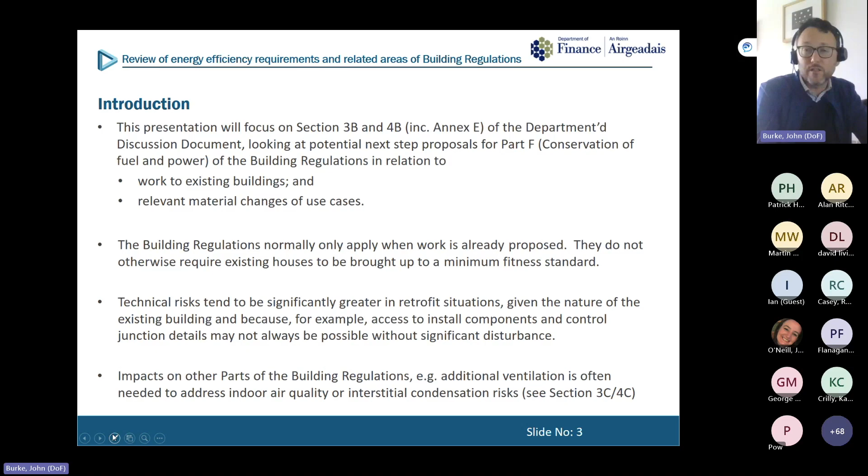It's also important to consider that there are always impacts on other parts of the building regulations—perhaps ventilation is required as you insulate, to address indoor air quality or interstitial condensation risks, but other parts like fire and structure are also obviously impacted by what you're looking at. So that always needs to be considered and maintained throughout, and we're taking that as a given in the rest of the presentation.

So we've got it in two parts: existing dwellings and then existing buildings other than dwellings. Many of the themes in the existing dwelling section are very similar to the proposals or measures for buildings other than dwellings.

I should say these sections are really focusing on next steps in this area. This is the phase 3 proposal. We have a 5-phase program. Our discussion document that we're talking about here is phase 2. The next uplift will be what we call phase 3.

So section 3B and section 4B are our next steps proposals for the standards for works to existing buildings, and they follow very much in line from developments in England and the other administrations, in a similar way to some of the previous sessions we've talked about. So section 3B relates to standards for a variety of situations.

There'll be standards for extensions, for new and replacement elements and services, for renovation of an existing element, or if you were to bring that element into the building - if you were roofing over a rear yard and the wall around that yard would now become part of the building, that would be a situation like that, perhaps. There'll be a retained element. And where a greater or lesser number of dwellings is created by a change of use in an existing building.

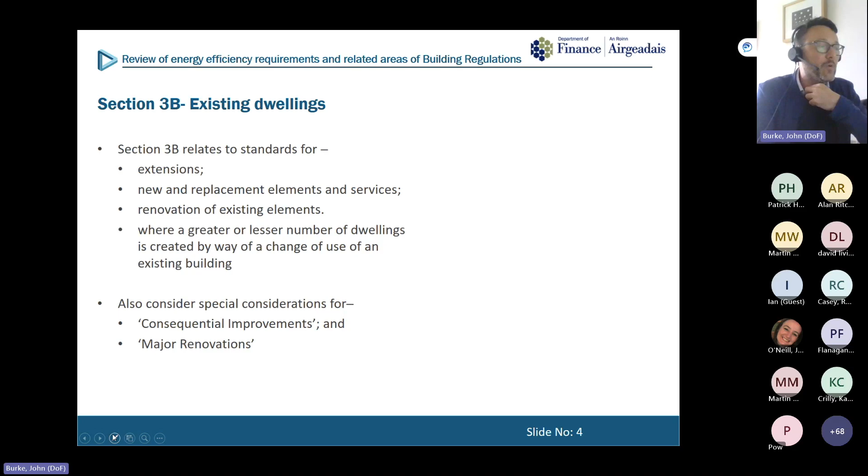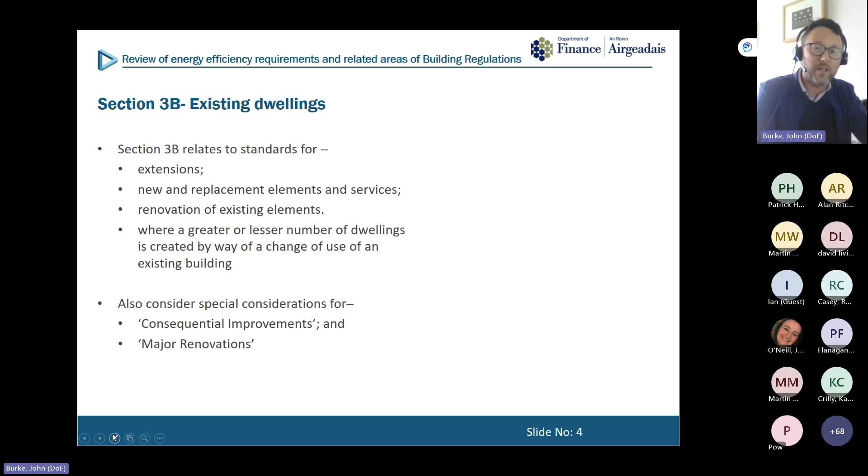There are also two important terms that those of you who've worked with the building regulations should probably be familiar with - that's consequential improvements and major renovations. So the documents give a bit of extra consideration around those, because they're specific things we'll talk about. We talk about these standards in general, and then we move to those specific scenarios, those specific situations.

In terms of the regulations, the general requirements tend to stem from regulations that sit within Part A. That's Regulation 6 and Regulation 7. Regulation 7 applies to the structure and the envelope. Regulation 6 is the application to services and fittings.

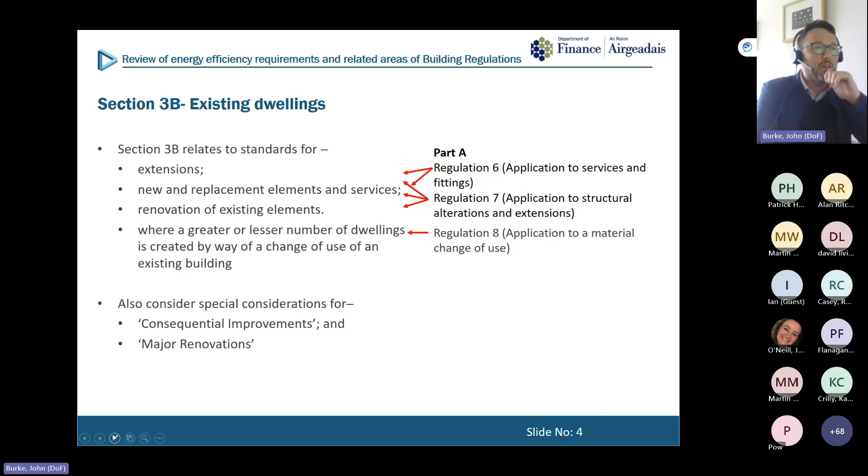Regulation 8 is a bespoke table of what bits apply where whenever you have a material change of use, and has other considerations in it beyond that, of course, but Regulation 8 is what's governing that.

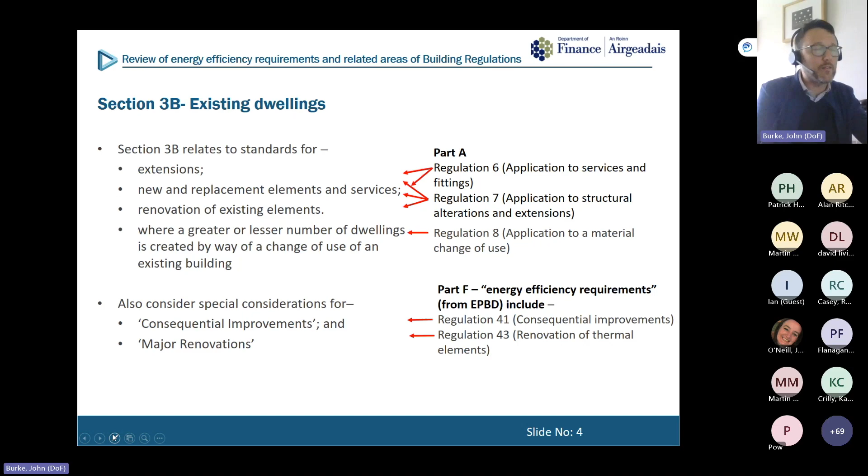Whereas these other issues like consequential improvements and major renovations really stem from some requirements which flow from the Energy Performance of Buildings Directive, the energy efficiency requirements, some of them are known as. So there's Regulation 41 and Regulation 43, and they're quite particular and come from that history and through that route.

So we've mentioned in an earlier session about a legislative refresh. What we have here - obviously you can't read it all - is the extract on the current legislation for Part F. There's a lot of it, and a lot of it has flowed from the Energy Performance of Buildings Directive.

Some of the wording in it, we think there ought to be some scope for improvements or simplification there. So we have a general question in section 2 of the document, but I think it's worth highlighting here, where we ask about a legislative refresh around that.

It's just worth comparing it to Part D. There's Part D by comparison for structure. So there's quite a difference there, and the general intent of the building regulations would have been that regulations should perhaps be more akin to the likes of Part D, with a general overall reasonableness or adequate level of performance or requirement, and then the details really provided in the technical guidance.

So if we can have a legislative refresh and try to simplify - I don't think we'll get back to the simplicity of Part D, but if we can maneuver back toward that approach, that's something that is a bit of an aspiration for us, if it's possible. So question 2A.4 asks about that and asks about your ideas around that. It's worth bearing that in mind, particularly as we come to look at aspects of consequential improvements and major renovations and things - that'll come up a bit later.

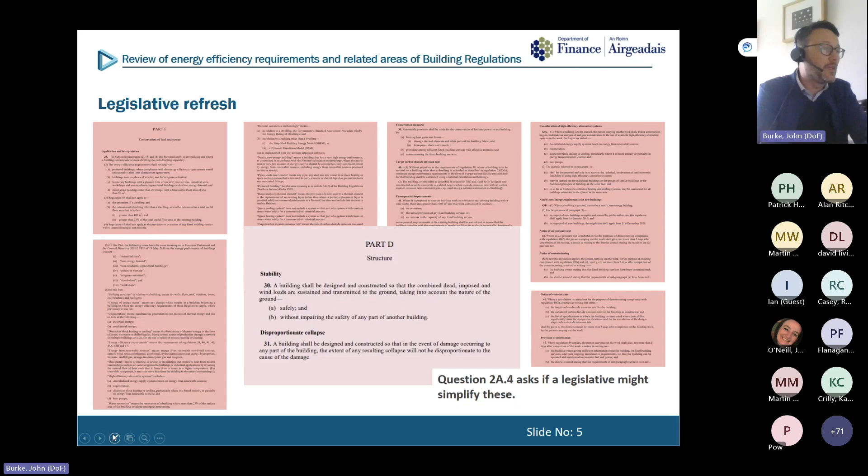We also have a general theme around traditional construction. There are aspects of Part F and things that don't necessarily need to be applied—and I must correct that slide, because it's not quite right, it should really be referring to Article 3A—but that the enforcement can be applied taking into account the character and appearance of the building. Some aspects of Part F are also explicitly excluded, and that's catered for in Regulation 38.

So when it comes to traditional construction or protected buildings, they're really looking for the character and appearance. We're interested in whether that might be extended, because vapor permeable and traditional construction is an area where careful judgment is really needed. We're looking to see what might be done around that as a general theme throughout the document. So if we're setting standards, do we have different standards for traditional construction, or do we refer out from that?

Clearly the assessment of traditional construction and its ability to support renovation measures is a developing area. There's lots of new things coming through with multiple interacting issues, and it requires balancing and considerations in each case. So we're alert to that, and it's a bit of a theme that flows through the consultation.

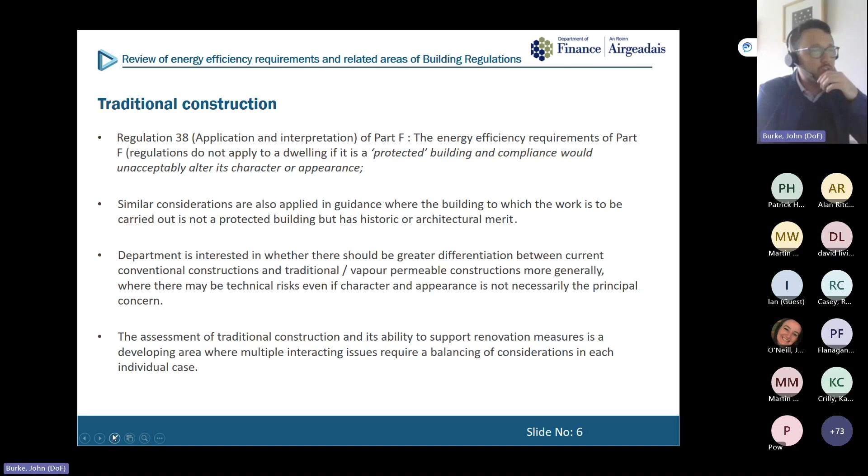In general, I'm sure most of you are aware, but it's worth reviewing—there are generally three approaches, particularly when looking at extensions: a standards-based approach, a calculated trade-off approach, and an equivalent carbon target approach. We'll discuss those now, but it's important to realise that not all of those approaches are available in all situations.

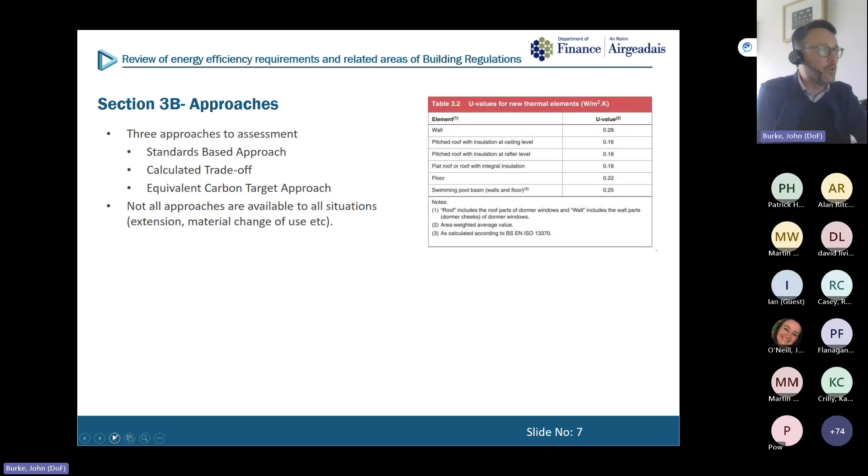For example, a calculated trade-off approach mightn't necessarily apply when the majority of the measures you've got are existing or renovated elements. There's a cost-effective thing you should do to a renovated element, and that kind of applies throughout the process. We'll come to this as we go through it. But the standards-based approach is obviously the most straightforward.

It takes each item, whether it's a wall, a window, a boiler, a radiator, whatever it is, and it sets a requirement for what the standard ought to be for that new element or that retained element, if you're doing work to it—so if you're building that, or if you're renovating it.

So we've got there the current table for the minimum U values for new thermal elements, which appears in the current guidance. And if you follow each of those, and each step and each part of your building meets that requirement, then that's fine.

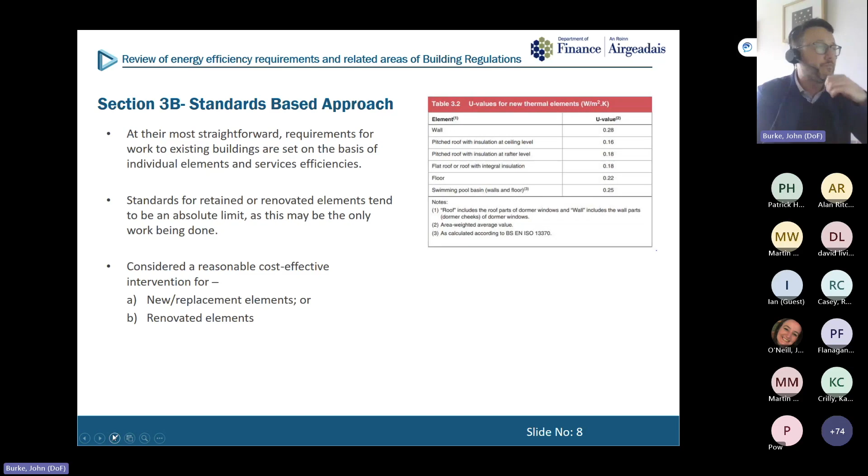The calculated trade-off approach is an alternative approach where you can have a lower standard in one area, provided you improve the standard in another, and it generally relates to the U values of elements only—so it's not looking at services. It assumes you're meeting all the minimum services requirements and allows you to calculate, and as long as your average U value performs the same as the U values for each of the thermal elements, then that's acceptable.

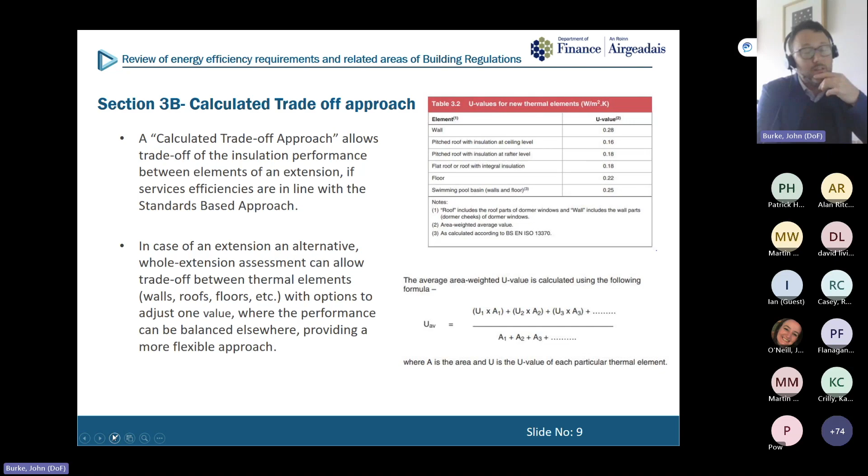And that would be used a fair bit in extensions, particularly where a more glazed extension than the limit assumed under the standards-based approach is needed. I'll just go back a slide—have we got that in the standard slide? No, it should have included a note that glazing limits would apply, and so this would be one way to have additional glazing if that were something you wished or wanted.

Then the third approach is an equivalent target approach. You can take a more holistic model, so you could balance some services, some renewables, some U values, and again model that against the standards-based approach. You design your building as per the standards-based approach, model that, then design the building the way you want it and model that. If the emissions under the second are no worse than the emissions under the first, that can allow you to construct to that level.

So that provides really quite a lot of flexibility, particularly because you could then incorporate measures in the existing building to compensate for maybe a slightly poorer standard in an extension, or by adding renewables you can offset.

There's quite a lot of flexibility in where this is permitted. The important thing to note, as people from the last session will know, is that there were two new metrics to be brought on board: one is primary energy, and the other, in England only, which we're thinking of following, is the fabric energy efficiency standard requirement. So as well as the current emissions requirement, under this equivalent target approach, the proposal might be that you also have to meet the primary energy performance and the fabric energy efficiency performance, in the same way you do for emissions requirements.

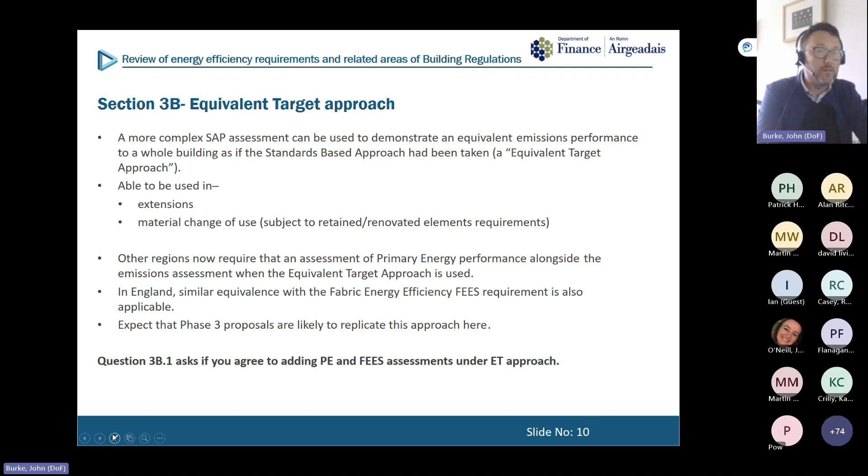In terms of elemental standards, the guidance across all the regions provides for a variety of situations with different terminology, different solutions, and different outcomes depending on the extent of work you're doing. In the document I've tried to rank them from extensions down to retained elements. Extensions and new elements tend to have a 'situation A' level of standards, broadly similar to new build situations, whereas 'situation B' is where you're retaining elements and structures, and perhaps renovating them, which usually has a different, often lower, standard of performance expectations.

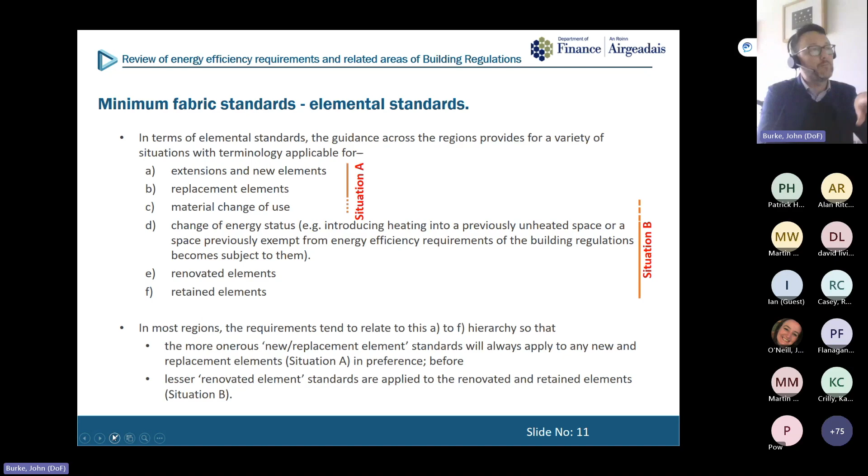You'll notice that material change of use is dotted in one and dashed in the other, because that's the crossover point about what standards or expectations you should expect to see. But as I've noted in the bullet points, the more onerous new replacement standards will always apply to any new replacement elements in preference. So broadly, with this ranking or hierarchy, you have to ask: have I got an extension, or am I building new elements? Those are the standards that apply, and then you work your way down the list as to which situation is expected to apply.

When we look at the building fabric, which is probably of the most concern to architects, the standards adopted in the other regions have been uplifted to come more broadly into line with new build expectations, and I think that's quite a significant uplift. There's a very big improvement in the standard expected compared to the current position. Our new build requirements were uplifted recently, in June 2022, and came into effect, but nothing was done to uplift the standard for new elements and extensions alongside that. So this will catch that up and bring it into line with the expectations for new builds after the next uplift.

These give you a flavour of the kind of U-values proposed. There isn't a huge amount of difference between the different regions. There's a whole building approach that sometimes applies, and whether you can offset and trade is relevant to some degree, because it impacts when you can do a calculated trade-off or not, and how that all works.

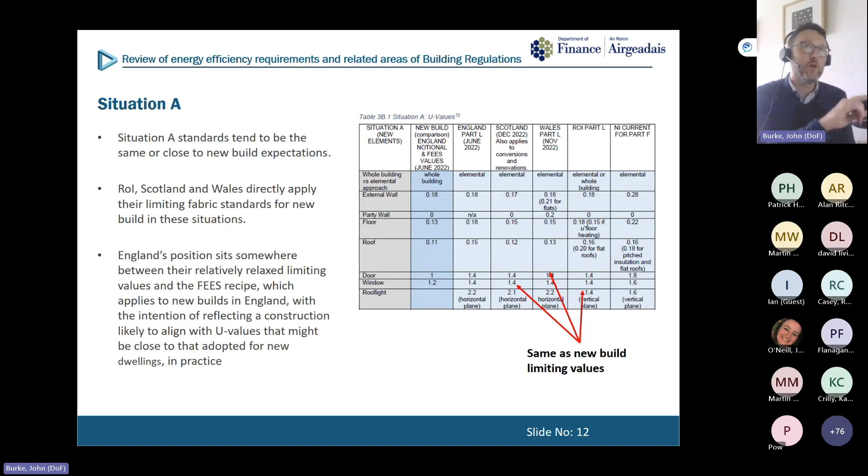Broadly speaking, the Republic of Ireland, Scotland and Wales are directly applying their limiting standards - the lowest standard acceptable for a new build is what they've put in. Whereas England has higher limiting standards, but also a fabric energy efficiency requirement for its new build, so it has split the difference more between its fabric values and new build requirements. The big one, and the interesting one, is for walls - it's expecting walls to achieve 0.18, which I think is quite significant. We believe that's halfway between the new build limiting values and the notional dwelling values, which is the model you have to broadly match in terms of emissions, primary energy, and fabric performance in England.

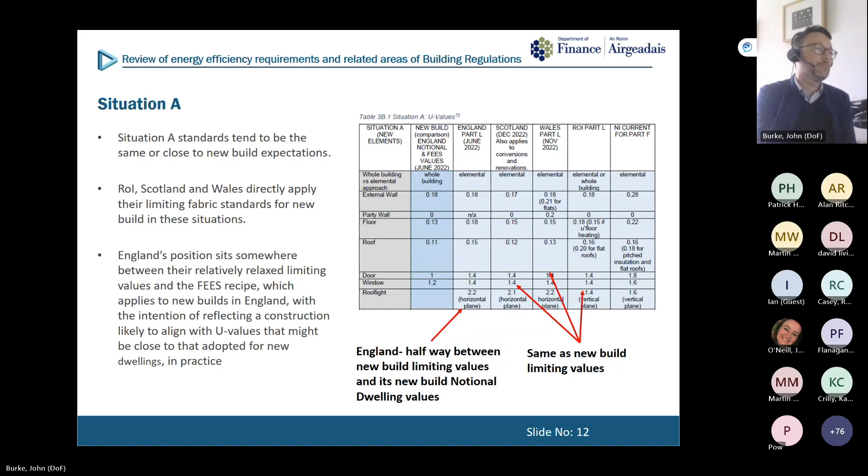England's consultation noted that its standards are intended to reflect the highest standard for each element, which is still cost effective. Our expectation is that England and others have looked at this and are applying a standard they feel is appropriate for their region and for the UK. We would need fairly convincing evidence as to why we wouldn't adopt a similar standard here.

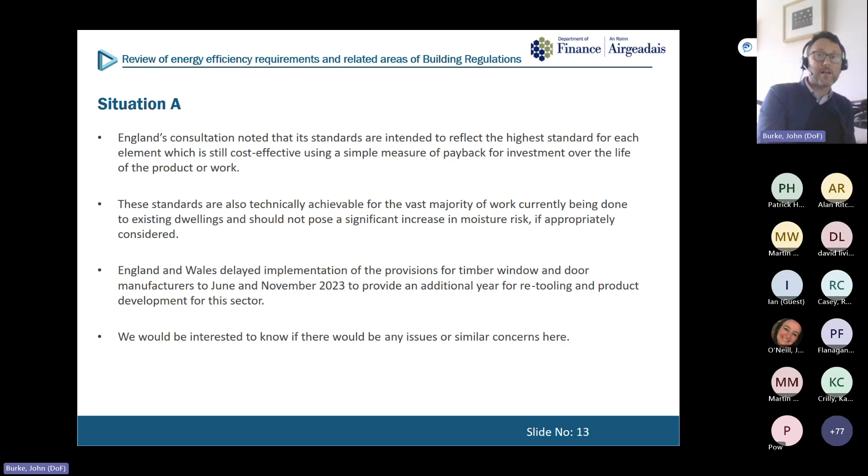So they've retooled for that. If there are similar concerns, or a particular issue, or some reason to delay some aspect of this, we'd certainly be open to consider that if the evidence or industry were to come forward on that. But there would need to be a reasonably convincing position or rationale for that.

The situation B standards there, if you look at them for walls, are 0.3 and 0.25, so they're a different level of performance. Again, England are saying these are the levels that they feel were necessary without posing this moisture risk. So that's the overarching position there.

There's nothing particularly new on the guidance in relation to existing buildings coming through from the other regions in relation to thermal bridging and air tightness. So people are encouraged to make those improvements, and it can be considered in the target emissions approach, but it's not a new metric or additional thing to have to perform a mark of performance against.

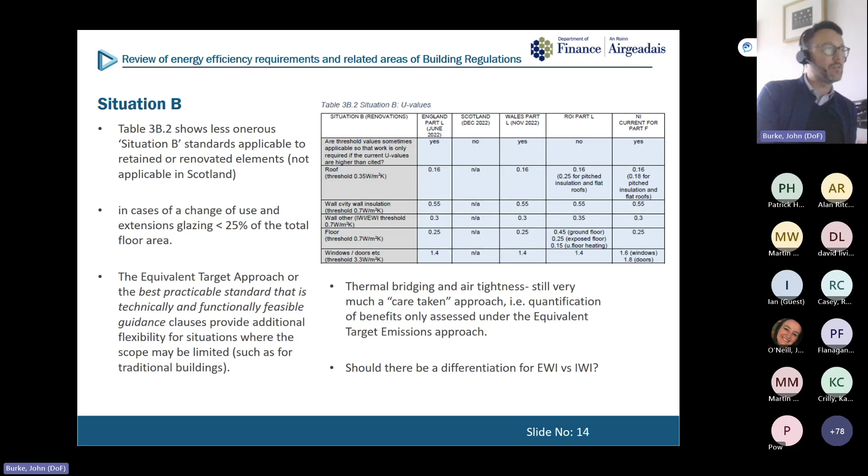Situation B interventions are normally predicated by trigger points. So normally you have to have a poor performance of an element - it has to be particularly poor to merit then having to do work to make it better. Those trigger points are listed there, or examples of them are.

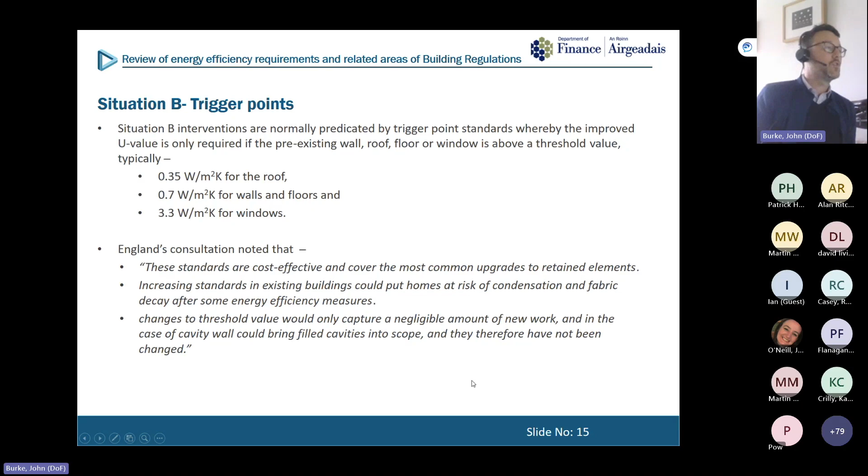England's consultation has noted and retained that approach, and has noted that the standards it's requiring are cost effective to cover most upgrades. They didn't particularly want to address cavity walls - it would seem an expectation that anything more than cavity fill shouldn't be required there. And they suggest that changes to the threshold value would only capture a negligible amount of new work, so they have not been changed for that reason.

But we have noticed that trigger point thresholds don't seem to be so applicable in Scotland or the Republic of Ireland, where the expectation is that the relevant standard will apply in a change of use or change of energy status for renovation work, irrespective of the element's previous performance. So there isn't the same poor performance necessary to justify doing the work to bring it up to scratch - it just has to meet a certain standard.

We've also noticed that Scotland's standards are much closer to new build expectations when a material change of use is occurring. So if you're an office block converting to dwellings, but not really doing any work, nonetheless the expectation is that wall performs pretty well close to the new build wall standard. So a bit like an extension would have been treated, the new wall would have to meet the new build standard as opposed to the retained element standard. So in Scotland that falls into situation A, in the rest of the UK it falls into situation B.

But Scotland's guidance is quite carefully written so that it has greater flexibility for traditional building situations. So that's something of a consideration.

And we'd also note, coming back to our suggestion about trying to imbue or strengthen the emphasis on traditional building and the care that's needed, Scotland has a definition for it. It does appear in some of the other technical guidance booklets too, but it refers to a building or part of a building of a type constructed before around 1919, using construction techniques that were common then, with permeable components in a way which promotes the dissipation of moisture from the building fabric. We think it might actually be dissipation of vapor, moisture vapor from the building fabric, but that's where we need to go.

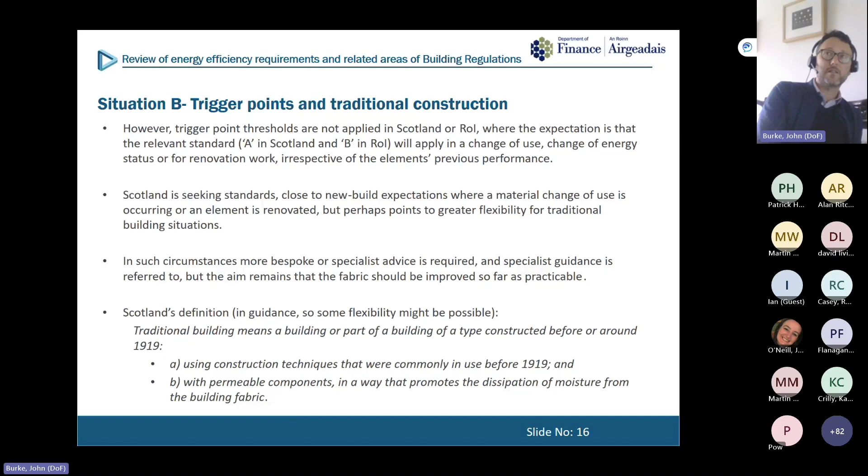That definition is probably worth our while considering. But if anyone has anything else about that, or concerns that the date limit is arbitrary, or there should be a different date limit here, or that these techniques with bio-based materials and things might be more relevant even to new build construction or something, that's something we're open to hearing and taking evidence on.

Minimum fabric standards in existing buildings. So the department's overall conclusion on all of this, our current position and direction of travel, unless something comes through in the feedback, is really that new and replacement elements should be largely in line with the expectations for new dwellings. We'll be looking to implement something, depending on what we do on new dwellings, will impact what we do here. But if you were to follow England, we'd be more likely to follow the kind of expectations of the standards that England has outlined in its current guidance.

Given the technical risks, a lesser performance is obviously appropriate to apply to situations of material change of use, or where you're retaining or renovating an existing element. And we also think there's further or additional considerations that need to be outlined or promoted where it is a protected building or where traditional construction is used. We come to that in point E.

Guidance on the installation of insulation will include an increased emphasis on the sealing of air gaps. We think that's an important theme that has also come up in some of the English measures, and we think that's an important aspect of things. If the air can circulate around an insulated panel or in through cracks, it's of limited benefit, obviously. And the extent of glazing should generally be expected to be no more than 25% of the floor area, as currently applies. An increased emphasis on considerations and provisions for traditional construction should be made.

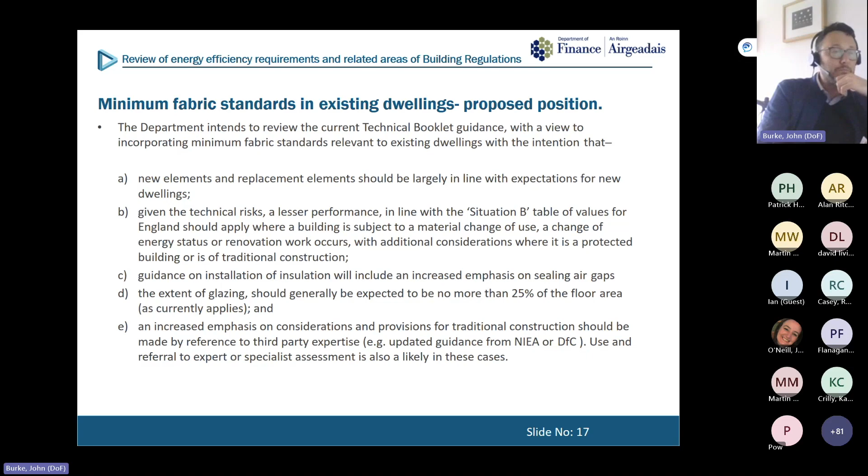So we've asked a range of questions on that, which I don't think there's any need to go through now, but it's broadly going through those same questions or same issues that we've outlined.

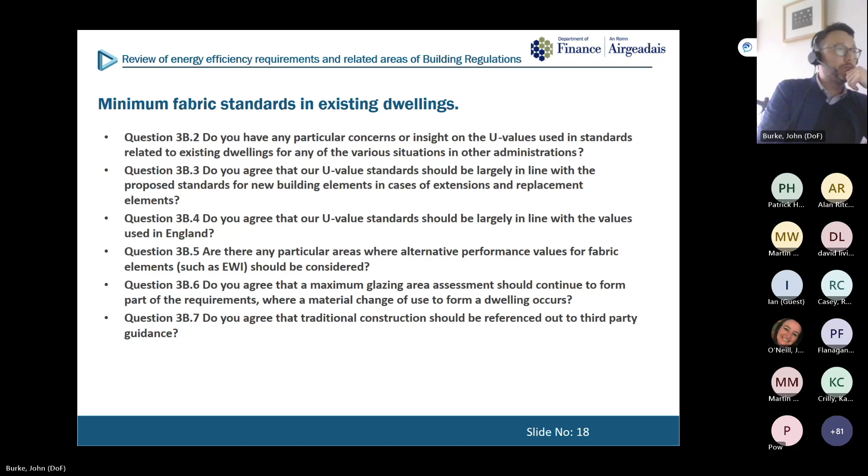And I also wanted to note, and we'll cover this more in our next session, but just to reassure people, there's a proposed measure under the ventilation section. So that's where energy efficiency improvements made to a dwelling are categorized as major or minor, and they stack up to then put you into category A, B, or C for the extent of ventilation consideration that you might need.

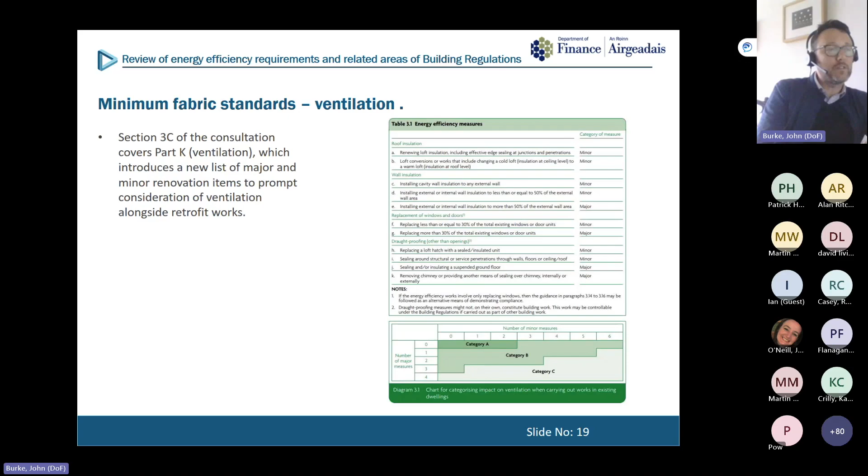From memory, category A wouldn't really require you to do anything. Category B would allow you to make some reconsideration of your natural ventilation or something, and C would require a more mechanically led approach, perhaps. So that will be outlined properly or more authoritatively in our next session. But this principle of doing these things and adding up into this table, I think, is just worth noting today.

A further thing that's happening is that the Domestic Building Services Compliance Guide has been brought into the approved document in England and Wales, and it was always in Ireland's guidance. In contrast, Scotland has retained separate guides, which do seem to provide more wide-ranging, more informative explanation for what's happening and why they're there and why the decisions are the way they are, as opposed to the technical guidance, which is really there to try and demonstrate compliance, or to draw as clear a datum as possible of performance expectations for common building situations. So you get a different tone.

So if people are able to look at the two options and consider which they think is more appropriate, our current expectation would be that it's better to have it all in one place and have it all available. And that's where we tend to go.

There is something of an issue we'll have to consider on an ongoing basis in relation to eco-design requirements. We believe everything in the current English AD is up to scratch, certainly as far as eco-design 2018 standards are concerned, but there could be issues about Northern Ireland having to maintain ongoing compliance with EU eco-design requirements. That's a longer term consideration we might need to think about more as we move forward, and whether, if they're dynamically changing, we need to refer directly to the way you can find out whether the boiler, heat exchanger, or whatever it is you're using, meets the relevant eco-design requirement.

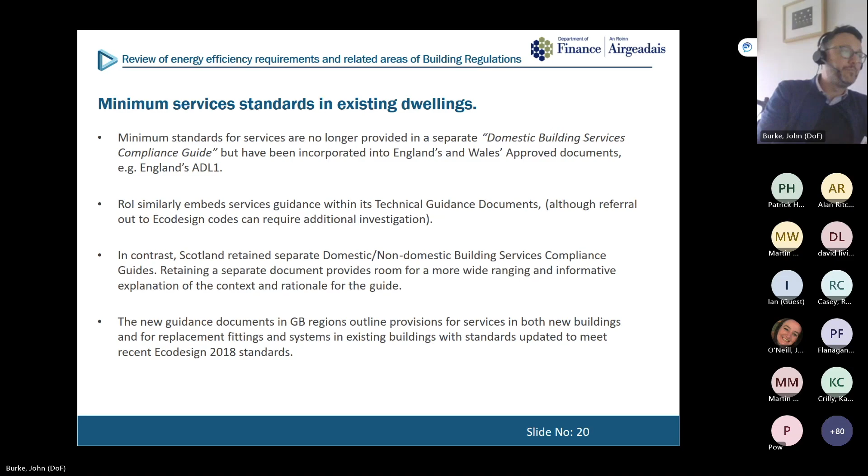We also think it's worth noting an uplift that occurred in England fairly quietly, not really pushed here. In 2018, England introduced a Boiler Plus standard to apply whenever a boiler is installed in an existing dwelling. It's arguably a consequential improvement measure, in that it's saying when you install a boiler, we want you to really look at some additional controls and things.

The changes were mainly focused on the gas boiler sector, and would mean a replacement boiler would need, first of all, to use the ERP seasonal efficiency as standard, with a minimum of 92%, and not significantly less than the efficiency of the appliance being replaced. It should install a boiler interlock and time and temperature controls, and additionally for gas-fired combi boilers, there's a range of four items, one of which should be installed alongside it. So it makes a boiler replacement more expensive, but gives you better controls alongside that.

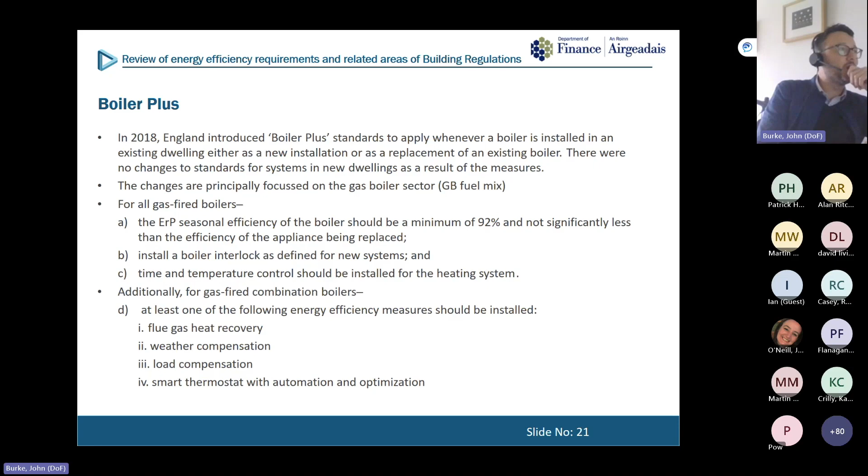That was a measure introduced in England, and it would form part of the overall package. There was not a lot of concentration on oil boilers in that package, but there is a requirement for time and temperature controls for oil boilers when that's done. So that was there, and yeah, okay, that's all still there.

There's a slight difference between the ERP and the SAP SEDBUK assessment, which we think is still used for the carbon and primary energy SAP assessments. So that's just something to bear in mind.

In addition, new measures were introduced in 2022 in all GB regions to require thermostatic controls. England's latest uplift also brought in a requirement for thermostatic controls when a heating appliance is installed, applying both to new builds and replacements. This means you could effectively require thermostats and thermostatic radiator valve controls at a room by room level, which flows from a requirement in Article 8 of the EPBD as amended in 2018. Theoretically, these are requirements GB or UK has agreed to try to implement, so we'd be looking to replicate that. The question is there to ask questions on that.

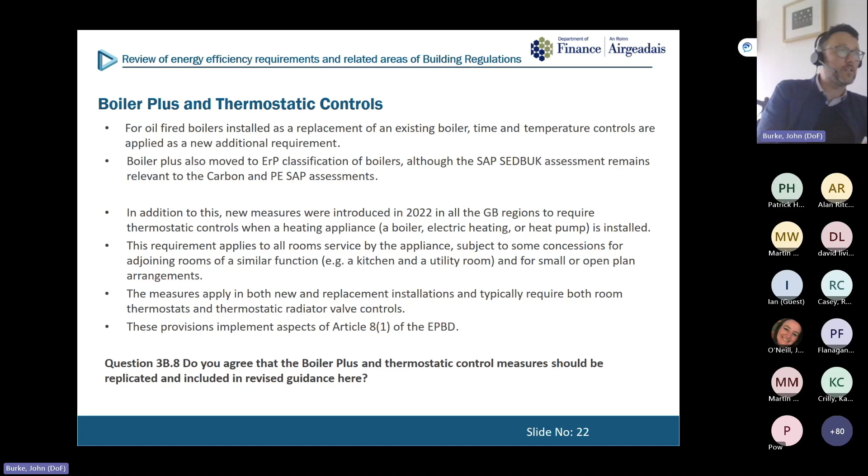Similarly, we outlined this in the new build section 3A: when new heating systems are installed, either in new buildings or where a complete replacement system is installed in an existing dwelling, the expectation would be that it should operate with a maximum flow temperature of 55 degrees C, a relatively low temperature system requirement. It makes existing boilers work more efficiently, or means standard and condensing boilers can operate more effectively, but it also helps future-proof the home toward future replacement with lower carbon technologies.

It would apply in both new builds and where a completely new replacement system is installed, but it wouldn't apply if you're just replacing a boiler, or just replacing some pipework. It would need a complete building refit for this requirement to apply.

We've also got the issue of the new primary energy check. If you are changing your fuel at the minute, the current guidance requires that you shouldn't be any worse than 2 percentage points in terms of efficiency performance from the system you were on. It also requires a CO2 emissions factor assessment to make sure that the fuel you're replacing it with isn't any worse in terms of emissions than the one you originally had. So it's quite an onerous assessment.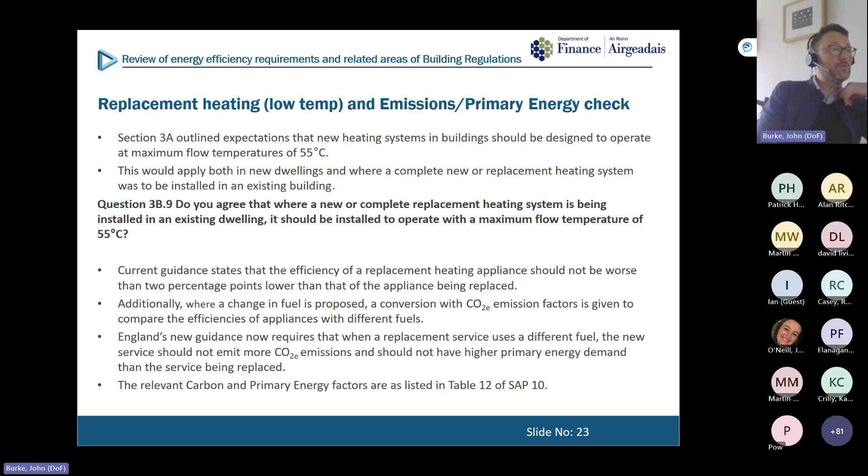That will continue, but there would now also be an additional primary energy assessment as part of that, again to stay consistent with the metrics and requirements being deployed for the new build sector. There are some consequences to that which we've outlined in the document.

We also review an alternative, which is Scotland's delivered energy route. This has implications for wood pellet boilers being installed in existing buildings. There's also an interesting aspect: if you follow the PE assessment for England and Wales, replacing with an electric boiler using the PE factors in England's Table 12 of SAP means direct electric solutions become that bit more difficult, whereas direct electric isn't so much of an issue under the Scottish assessment. At least that was our assessment of how that would roll out. So if people working in England or Scotland are finding these differences, or have any comments, that's something we're interested to hear about.

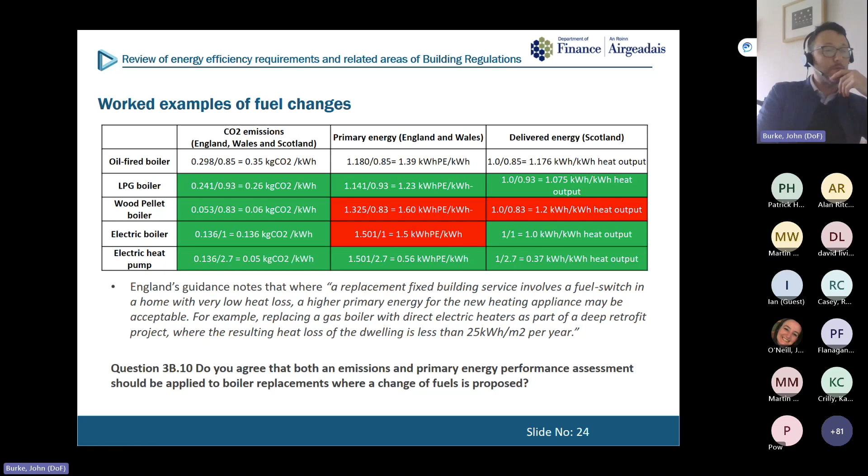We should note the direct electric scenario wouldn't apply in England in the same way, as they have an additional clause. If the heat loss of the dwelling is less than 25 kilowatt hours per square meter per year, and you can demonstrate that, then this PE requirement wouldn't necessarily be applicable.

We have a question also - we're noting that liquid biofuels are possibly increasing, and we're asking about the risk of potential reversion back to conventional kerosene or home heating oil, and how that might be controlled. We'd be interested to hear from industry, and we'll be trying to find out more about that.

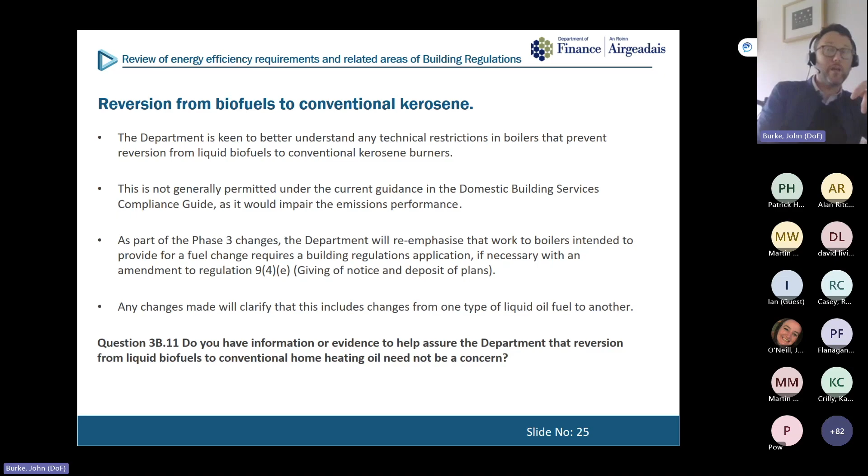The risk we have is that, if these were to be illicitly restored, we've got a general expectation that our regulations will make it very clear that a change of fuel would include a change from home heating oil to a biofuel, or a change from one type of liquid oil fuel to another. That would explicitly be a fuel change, as opposed to it just being a liquid fuel or a liquid oil. So we'll make it very clear about that.

Service efficiency improvements: there are a range of minimum service efficiency improvements listed here. We're not aware that any of them are terrifically an issue, but we'd be interested if people are - we're not mechanical engineers, so we don't necessarily have the insight on this that could be useful. We'd be keen for the building services sector to tell us if there are any difficulties with these having been introduced in other regions, or if there's an aspect that needs greater consideration. We'd be open to opinions and to hearing what's going on, but our general expectation would be to move in line with those developments following England.

Similarly, obviously, if there are aspects of it which need further development or consideration because they don't go far enough, again we'd be keen to hear opinions and to hear if society is generally in agreement with this or not.

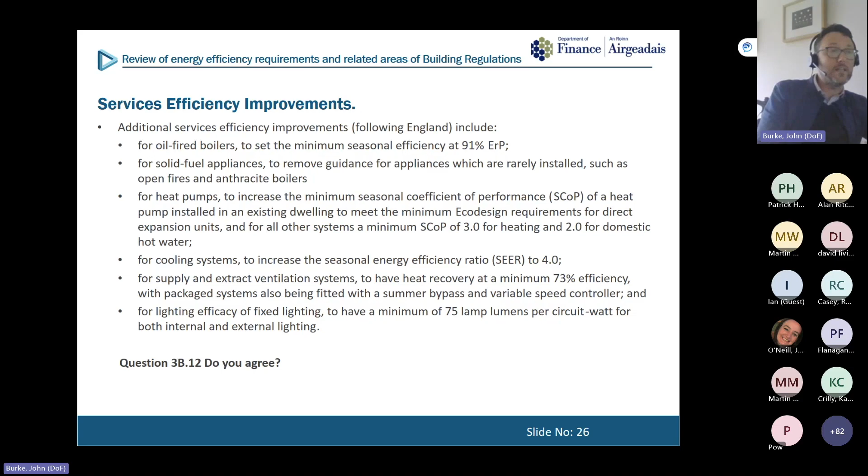We have a section on consequential improvements, and this is an interesting area. Consequential improvements require additional work to be done than the work you were originally intending to do. An example is Boiler Plus, where you're expected to install some controls whilst you're replacing your boiler. I only wanted to replace my boiler, why do I have to spend an extra £300 or £400 installing these controls? The problem is that if you set those requirements at a very onerous level, you might put people off doing the work at all, or overly impact people carrying out an emergency replacement.

It's a balancing act on consequential improvements, and a similar thing tends to apply to major renovations. There's also a particular aspect of this applicable under Regulation 41, which applies a requirement that if you're extending or doing work to a large building over 1,000 square meters, you spend a portion of that on improvements to the existing building. We don't see that applying very often on the dwelling side of things, maybe to blocks of flats. We'll discuss that more in section 4B.

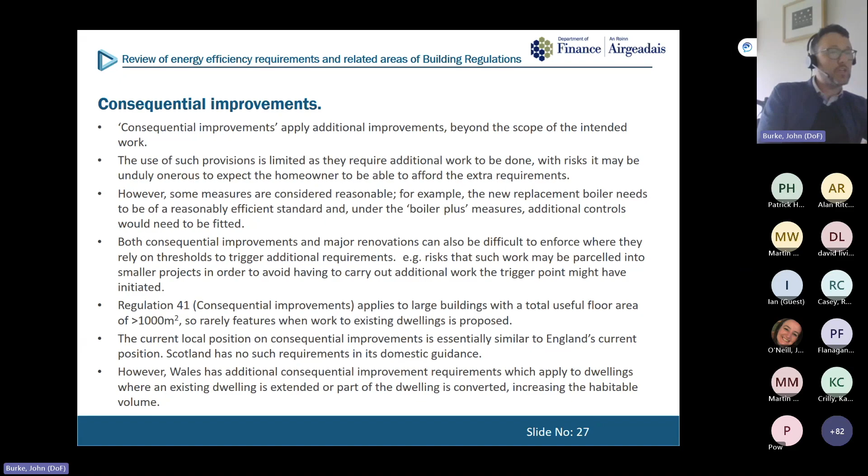It's noticeable that Scotland has no requirements in the domestic section of its guidance on consequential improvements that we were able to find, but Wales does. Wales has quite an interesting proposal which we discuss in the document, so we'll move on to that now.

The measures in Wales relate to extensions. Where there's an increase in the area of less than 10 square meters, Wales suggests that loft insulation should be improved to greater than 250 millimeters thickness. If there's an extension with an increase in area of 10 square meters or more, then a range of measures, basically cavity wall insulation, cylinder jacket, and loft insulation, should all be carried out on the existing dwelling. That would be the most basic set of interventions that should be done on the existing dwelling, if it's suitable.

We think these seem to be very pragmatic, low risk and proportionate measures. If you're spending all this money on an extension, you should make some modicum of improvement to your existing dwelling if it hasn't already received these measures. We're keen to receive opinion as to whether something like this would be appropriate for extensions to dwellings. This is very much a requirement only whenever there's an extension to the dwelling, where these additional measures on the existing building might be suitable to be required.

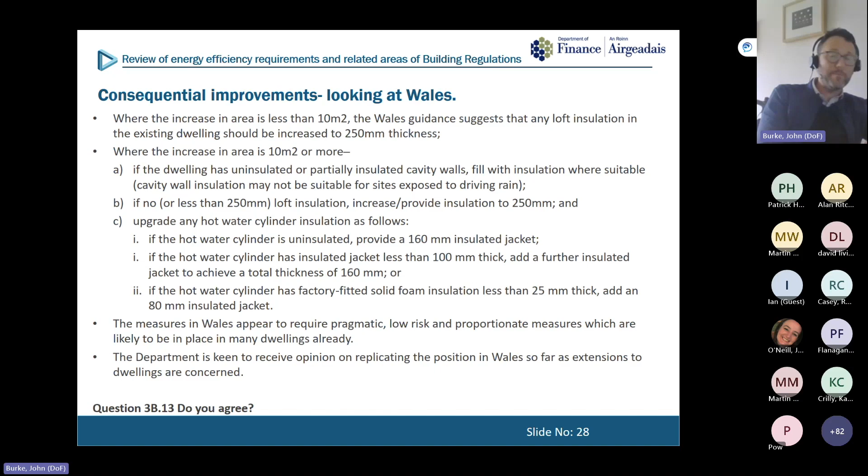Major renovations are a similar idea. A major renovation is defined as the renovation of a building where more than 25% of the surface area of the building envelope undergoes renovation. This comes from the Energy Performance of Buildings Directive, so it's very much an EU-led focus. The UK's interpretation is that if individual elements are being renovated as part of a major renovation project, then the whole of each individual element must be upgraded to the improved U value outlined by the guidance. There's a difference in interpretation in the language of the directive here, I think, at core.

But the Republic of Ireland has a different interpretation, and it sets additional requirements and expectations for more consequential improvements if a major renovation is being carried out. So it expects whole building performance up to a cost optimal level, expecting more measures to be applied to the whole building. So there are two ways forward.

Basically, if you fall into the work being in the scope of major renovation in the Republic, there are two ways forward. One is modelling to demonstrate that the whole building's energy requirement of 125 kilowatt hours per square metre per year has been achieved, and that's for the normal regulated uses as would apply under their DEAP assessment or domestic energy assessment procedure. Or alternatively, there are various specific measures like boiler and controls upgrades, loft and wall insulation, and they're all required to be carried out and considered cost optimal if certain major renovation work takes place.

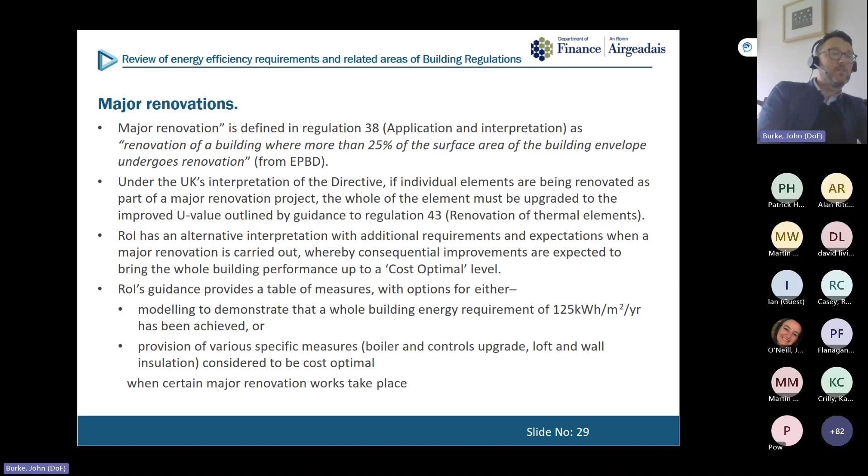So we have noticed though that there are reasonably significant exclusions to the ROI requirements. So 25% of the building envelope, they're excluding cavity wall insulation, which seems quite a large thing. They're excluding things like if you're adding a wet plaster layer and stuff like that. So it really seems to apply largely where one is involving external wall insulation or internal wall insulation as part of the work.

So by and large, we see those as quite significant exclusions, and we wonder, is there ways that people will game their way around these additional requirements? So perhaps phased applications to do up a part of a building and then another part of a building, or perhaps some other mechanism. So we're keen to receive evidence on the success or otherwise of the major renovation measures in force in the Republic, but at this stage the complexity and the extent of exclusions suggest it may not be a priority here. It may function in other areas, perhaps if there were major deep retrofit grants or something, but that's not really core to our considerations at the minute.

The department is particularly alert to unintended complexities that might emerge. So again, we gave this example earlier, but would external wall insulation be discouraged if it triggers a requirement for a boiler upgrade alongside the work? Might that blow the budget and mean that you can't do the project, or that people just don't want to do that as part of the package? So you actually inadvertently put people off doing work or make retrofit more expensive.

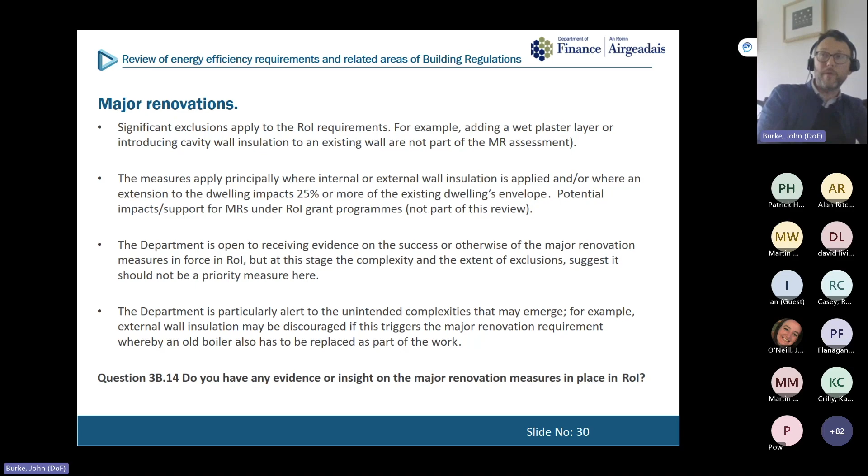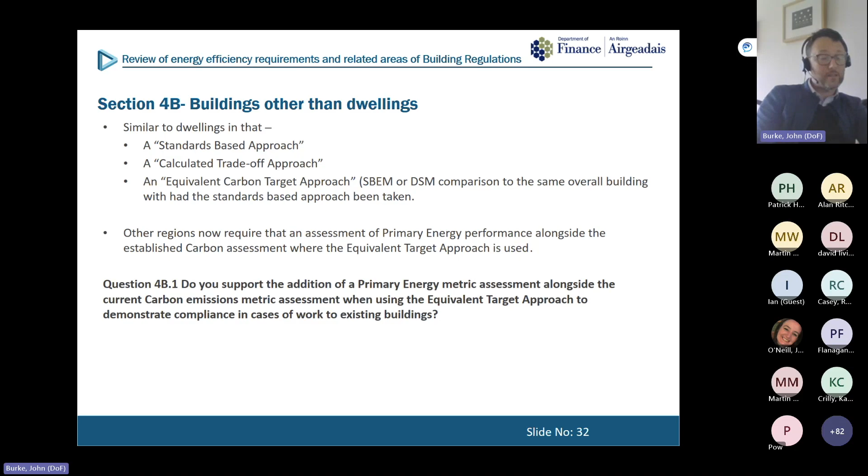So that covers dwellings as best as I can in the time I have. And I'm going to move quickly on then to buildings other than dwellings, and hopefully this will be a slightly shorter section. Again, you have the three basic general approaches, and again, you have the general expectation of a primary energy performance alongside the carbon assessment measure when an equivalent target approach is used. The FEES requirement that was being talked about for dwellings isn't something that's introduced on the non-domestic and the buildings other than dwellings side of things. So the FEES assessment side of things isn't there.

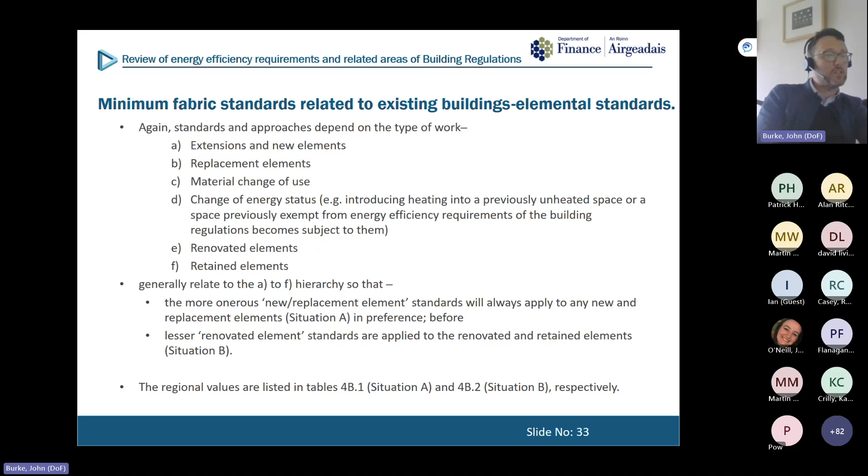Again, you have these A to F scenarios. Again, you have situation A and situation B kind of expectations. Again, it's worth just noting here the minimum fabric standards aren't of the same uplift in scope of uplift as they are on the dwelling side, so far as we can see. And I think you have to bear in mind there are lots of buildings where maybe cooling is a significant load, so there's more significant considerations.

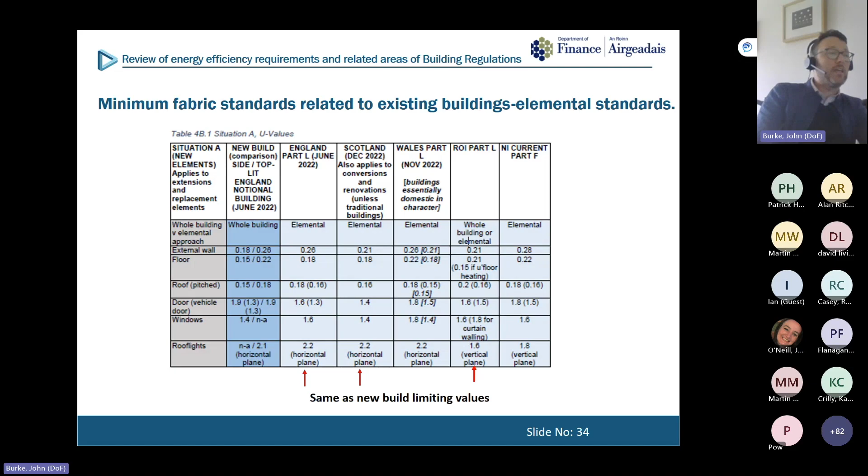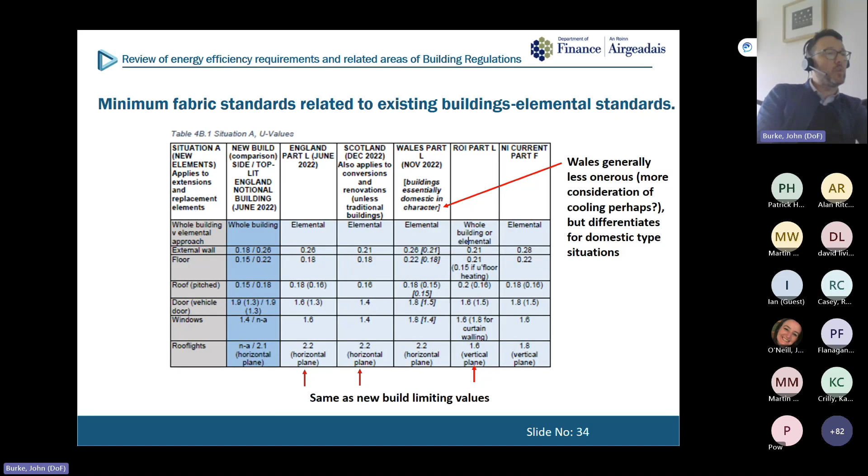Again, it's down to new build limiting values in most places. Wales has an interesting little adaptation where it applies slightly higher standards for domestic type situations. I presume that means things like care homes, maybe student accommodation blocks, things like that. So it's looking for a higher standard there, although I think I noticed there it is maybe slightly lower standards in one or two aspects. So that's a point that we kind of draw attention to.

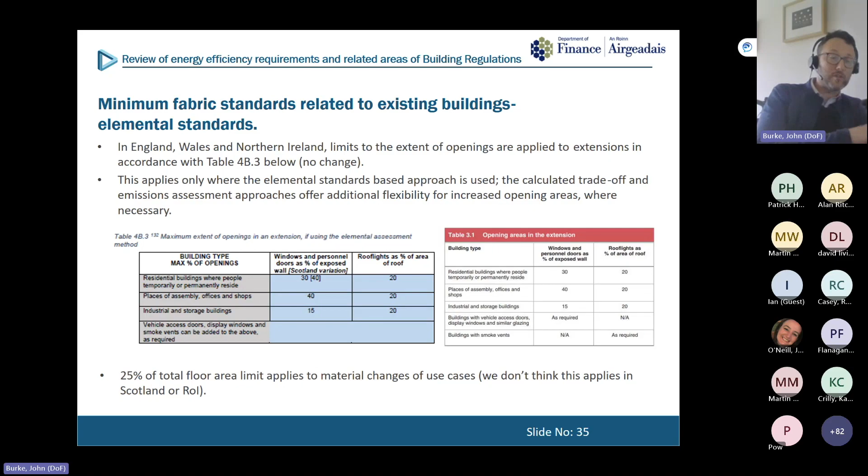There's no real change on the expectations on glazing limits for extensions or expectations around that. Still looking at the 40% figure for most buildings in terms of side-lit extent of glazing, so 40% of the wall. Curiously, these areas are provided in terms of percentage of the wall, whereas some of the areas for material changes of use assessment are very much on the basis of the total floor area.

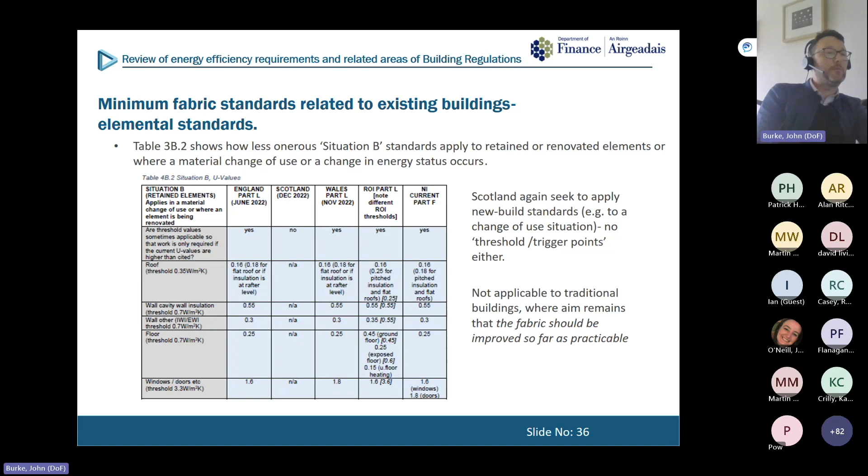And then the situation B kind of performances, again, quite similar to the scenario for dwellings. Scotland really requires the new build standards to be applied no matter what, without the same trigger points, but has more consideration for traditional building scenarios, such that the fabric should be improved so far as practicable. And again, we're mindful of the risks of moisture permeable traditional construction, and our general expectation would be that standard B performances should be a commonly attainable default standard for most situations, and then with extended emphasis on consideration of traditional construction to promote a thoughtful approach, encouraging expert judgment where necessary.

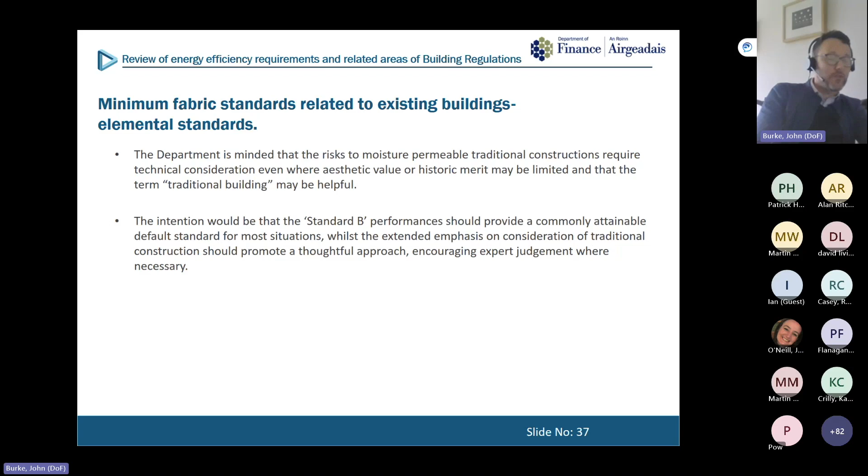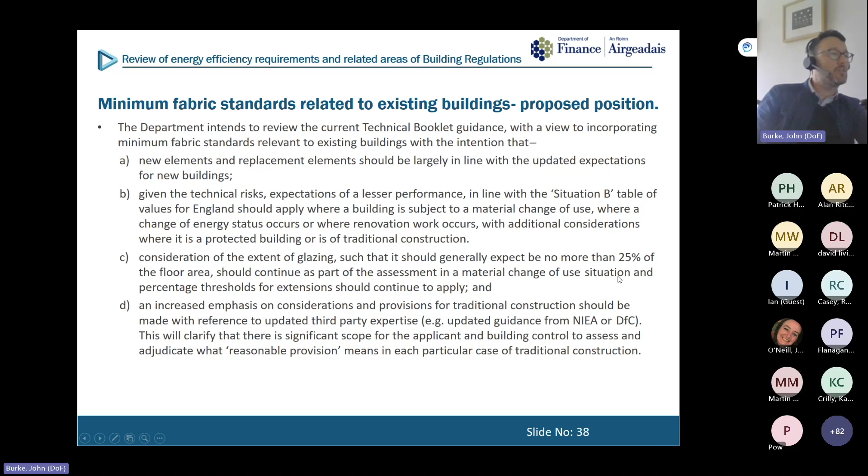So that's our kind of thoughts or general direction for that. And that's reflected again in the provisions, largely in line with the provisions for dwellings, so far as I can tell. Consideration of the extent of glazing such that it should generally be no more than 25% of the floor area should continue to be part of the assessment in a material change of use situation. So we're still applying those kind of expectations, and we still have questions on the same vein.

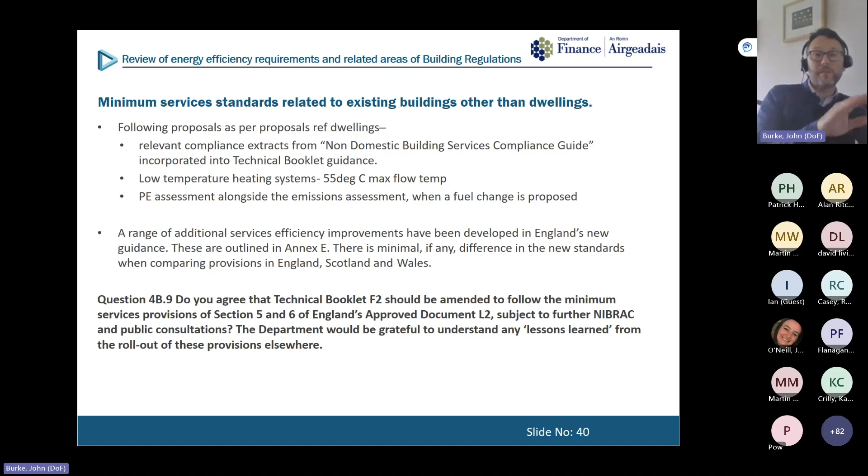Minimum services standards are a more wide-ranging and complex area than in dwellings. We've outlined these in a separate annex, Annex E. When we reviewed it, we couldn't see any particular difference between these minimum standards in the three regions in GB.

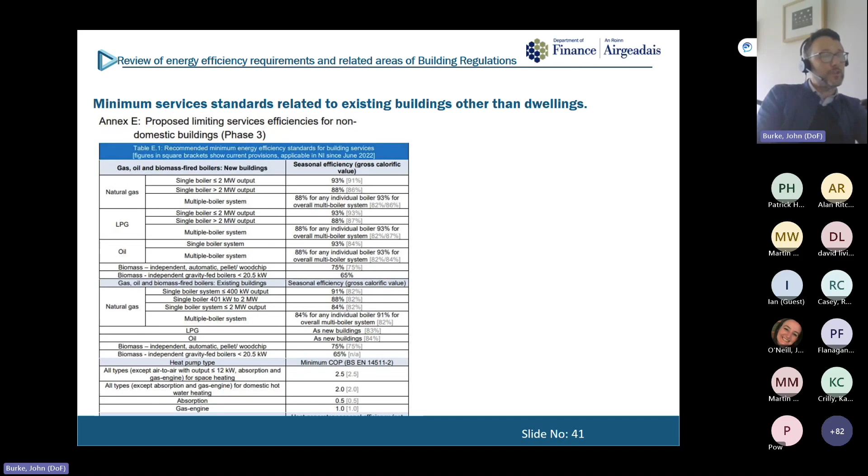So that gives us reasonable confidence that what's being proposed here ought to be appropriate here. This is an extract from Annex E, and the figures in brackets show the current provisions, since they were brought in alongside the last uplift, because we moved to the non-domestic compliance guide in our last uplift from 2012. So those figures in grey are our current standards.

There are some improvements in this, some significant improvements, I suppose. For example, for oil boilers, moving from 84 to 93% seems quite significant. Some of the gas boiler improvements too.

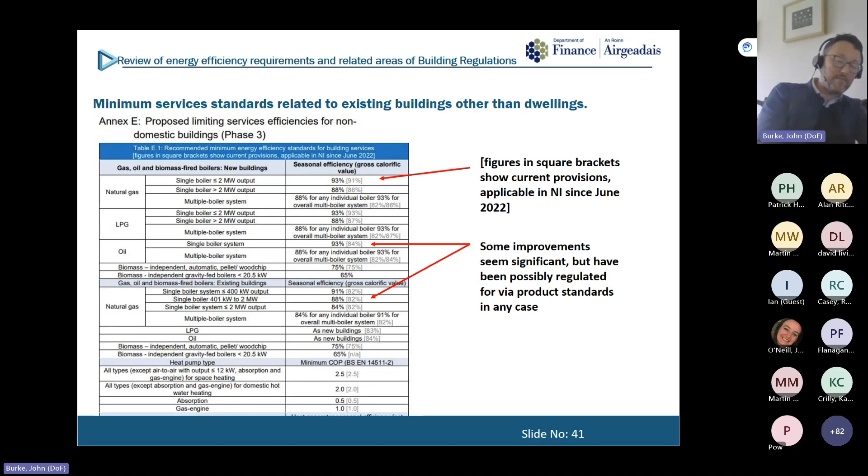But we're alert to the fact that energy-related products and eco-design requirements, we're expecting that these are the kind of standards that are commonly sold in any case. So this is where the eco-design, constant improvement has probably got ahead of building regulations. We'll be interested if that's not the case, or if we've made some misassumption, or if people working in England or other regions are finding these actually quite difficult to achieve.

In terms of consequential improvements, this is where regulation - it's forgotten, the actual regulation is 41 perhaps - certainly requires more consideration because of this 1,000 square meter threshold. It all stems from Article 6 of a directive from 2002, which got changed, altered, moved and developed, but that's what set the 1,000 square meter threshold, such as it was. As I've said before, there are risks in all these areas that requiring additional work can push the project out of bounds, or make it unviable, or could be beyond the capacity or finances of those carrying out the work.

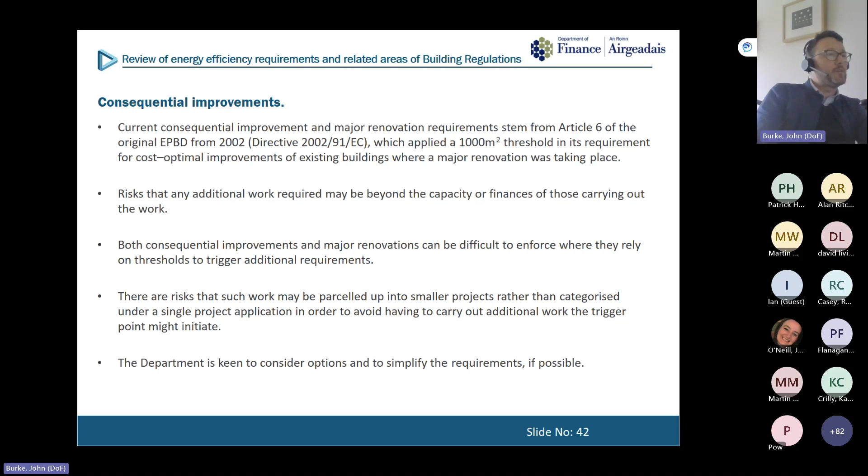So that covers those areas. We're also alert, going back to the legislative requirement, that because it was a directive, it needed to be all explicitly legislated for, as opposed to used, qualified or explained in guidance. We think there's scope for potentially a simpler approach in this area. So we're alert to that. There's a range of approaches to consequential improvements.

Here the expectation is, if you're building an extension to an existing building with a total useful floor area greater than 1,000 square meters, or if you're extending building services into or through a building, the expectation is that you'll spend an additional 10% of the principal works on improvements to the existing building.

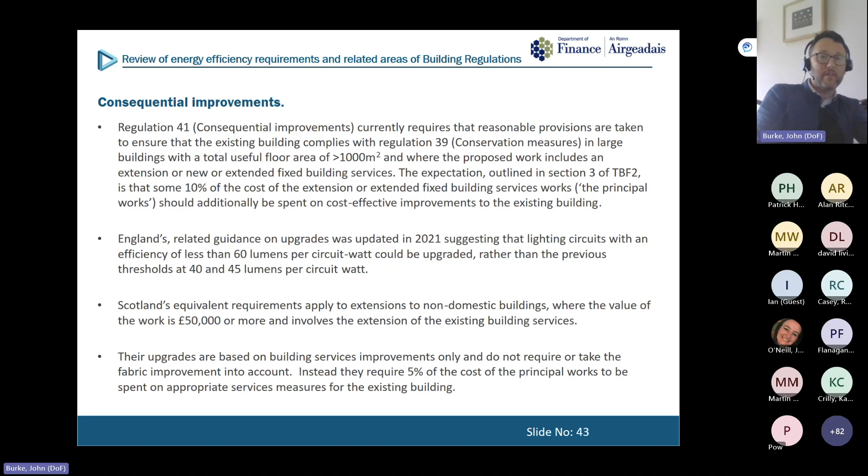And they do not require or take the fabric improvement into account. So I think, having reviewed it, it's really related to the services that they focus on, and that's the aspect there. Wales applies the 10% rule, but doesn't have any thresholds. So the costs of the extension are expected to be applied to improve the existing building, irrespective of its size or the cost of the extension. So it's an ongoing 10% rule.

Although it does have that rule, it's in relation to the extension of services into an existing building. So maybe you have 2 floors of a building and the 3rd floor is unheated, and you're extending services into that unheated 3rd floor space, then the rule would apply, but only for 1,000 square metres. So there's a slightly complicated position in Wales.

In any case, we're keen to receive evidence, maybe from district councils in particular, on how often this is actually occurring. Is this something that should be retained and kept in keeping with England? Is it something that should maybe be amended or extended, perhaps a bit more like Scotland or Wales, or is it actually something that no one ever does?

They find ways around it. They gameplay - they build an extension as a detached building and then build a little link, and somehow it's only the link that then gets applied, and it escapes the threshold or applies a very low level of cost interventions.

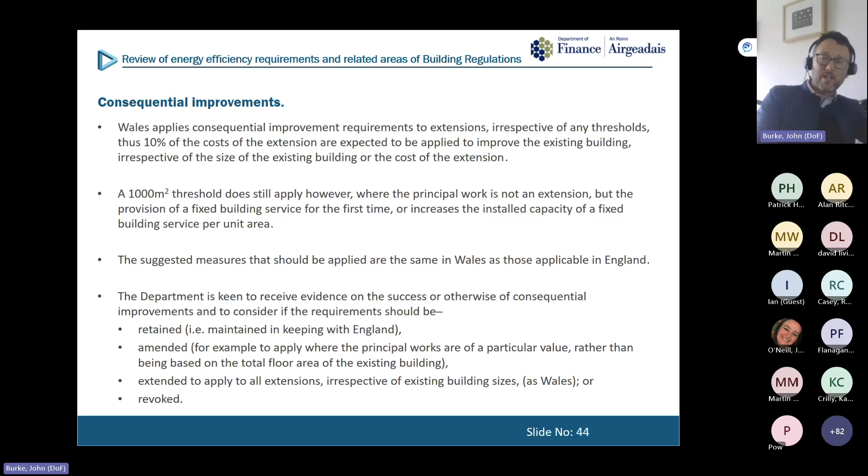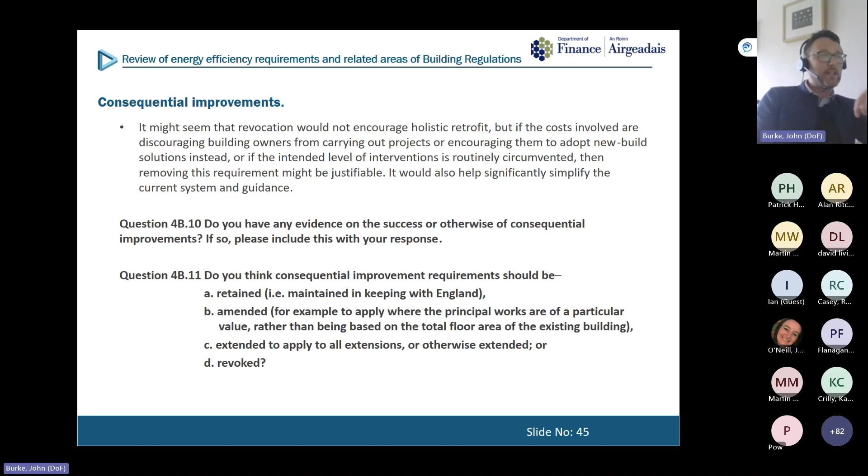Are these interventions, these regulations, worth continuing with, or is it something that might actually be revoked? At first it might seem like it doesn't encourage holistic retrofit, but if the costs involved are encouraging building owners to do slightly strange things to avoid it, or if they're just not working, or just not being effective - is removing this requirement something to consider? It's quite a complicated one to explain, and it's a significant portion of the guidance and the legislation. Would it help to simplify? What can we do to help simplify and make this a slightly easier proposition?

Finally, then, major renovations. Again, the same definition obviously applies because it came from the directive. There's no difference.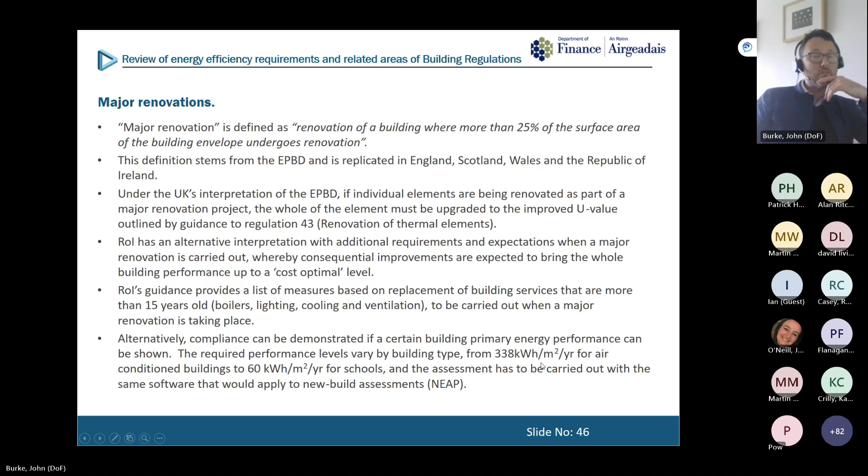Republic of Ireland again has this different approach, and there the two routes to compliance are meeting a primary energy performance requirement - we've given two examples here at the bottom - or replacing services and things which are more than 15 years old. So if you do those things, or if you obtain these levels of performance, you're deemed to have met the major renovation requirements when they've kicked in, in the Republic.

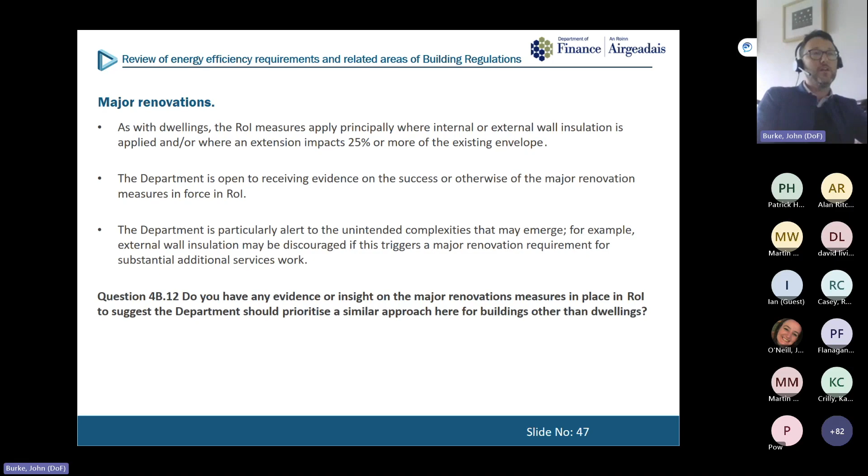So we're keen to receive evidence on the success or otherwise of that regime, and whether that's helpful, useful or sensible. And we're still alert to the unintended complexities that might emerge - for example, are you discouraging work because you've required too much or too many other measures? It's triggered you to do 10 things when you only wanted to do 5, and you just think, you know what, it's all too much bother.

So that's a bit of a race through, I hope, an overview of some of the themes and issues that we've highlighted in those sections in relation to the work to existing buildings. I'm conscious that we're just over an hour in here, and I don't know if there've been any questions. It's a really complicated area, how you do this work, and there can be all sorts of ins and outs and difficulties with it. So apologies if we may not be able to answer every question at every occasion, and we certainly don't have the mechanical expertise necessarily, so we're alert to that.